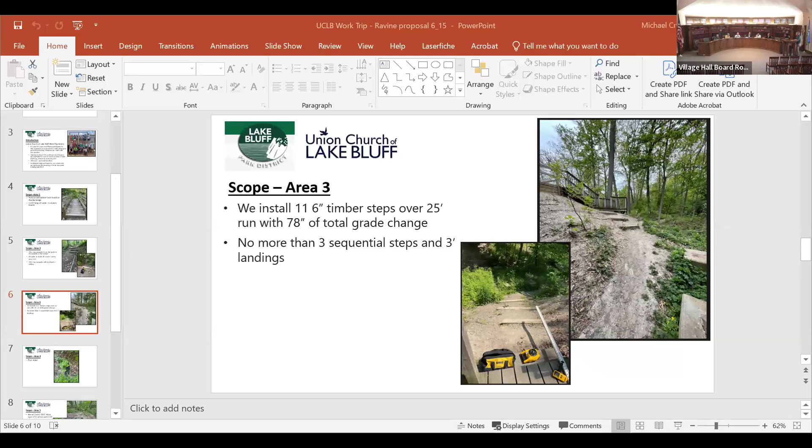John, you wanna give a little speech? Oh yeah, I'll put the PowerPoint on the screen here. I think you're on slide 6. Yeah, let me just start the slideshow from the beginning. Thank you. And there we go.

On behalf of the Union Church of Lake Bluff, we are happy to be here. I'm John Hirsch, representing them. We typically have done a work trip in the past to either Kentucky or Missouri. This year, our pastors are retiring, and they typically had led the work trip to all of these places. We've gone for about the last 25, 30 years, going out of state.

With their retirement, we didn't really have the bandwidth to organize a work trip. A number of people in the church said, well, what if we could do a project locally? What if we could contribute to the community that we live in and do something? So in the past, we've built — you can move to the next slide if you'd like.

And then to the next as well. So it's typically been a work trip to poor communities in Kentucky and Missouri, where we have built handicap accessible ramps and decks and those type of things for people in extreme need. And it's a great trip for our kids, a great bonding experience for them.

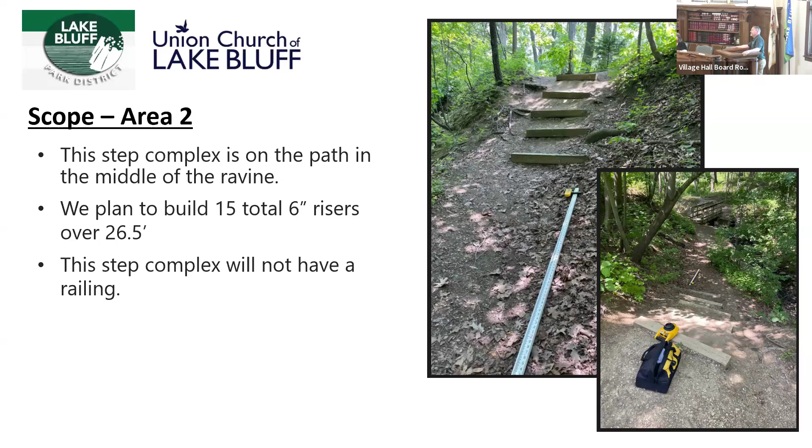We can go to scope number 3. This is literally right off the step complex that was just built, kind of underneath the bridge that was just replaced. You can see there's 3 steps at the top and then a really steep decline straight down towards underneath the bridge. Here we're planning to install steps again, to deal with the grade without needing a handrail based on the village code.

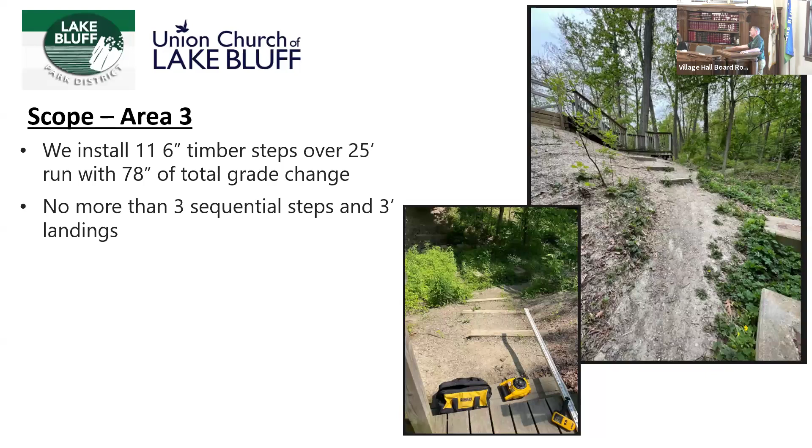And we can keep going.

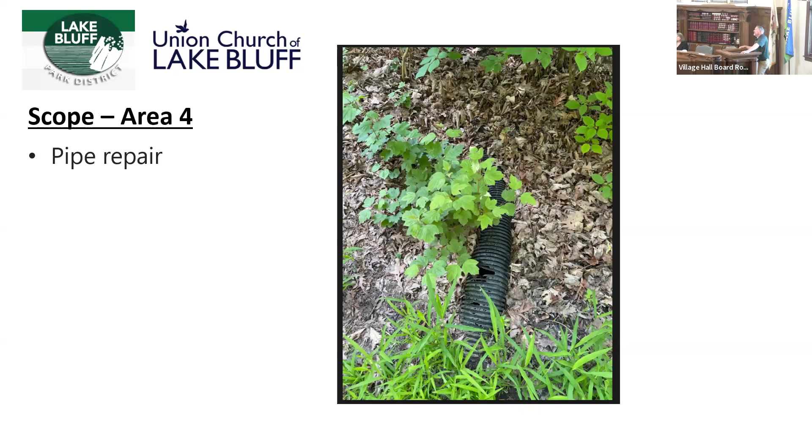And we can go to the next slide.

So very stable, and then we'd use grade 9 gravel to create the landings inside the timbers.

We're almost ready, honey. That's my wife, by the way. Congratulations.

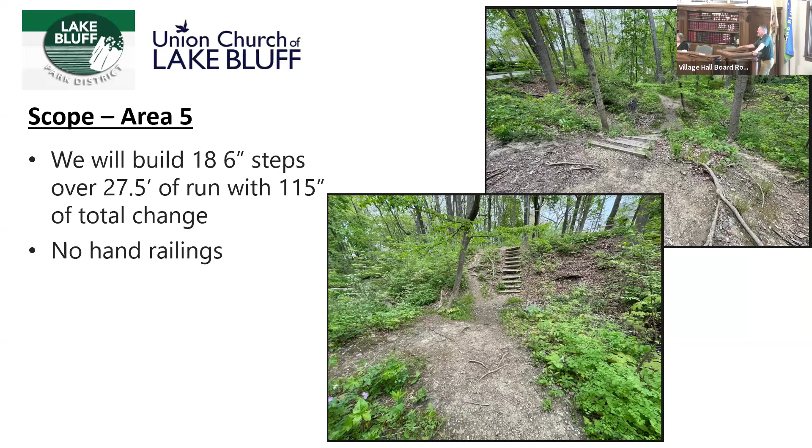All the participants are self-insured. We designed it to meet code so that nothing we build raises concerns. There was a concern with the park district that if we built something, their insurance company wanted to make sure it was built to code and professionally—not like an Eagle Scout project where someone could injure themselves and the park district could be liable. They were comfortable as long as we submit it to the village for permit, and the village approves and inspects it, so they were fine moving ahead with the project.

We can go to the next slide.

So timing, funding, approval - the project will be done if you approve it and we get our permit, which we're in the process of submitting and Mike is aware of that. So the project would be done this Saturday and Sunday.

That's the idea - we knew that a lot of the kids who have participated in the work trip in the past are going to be in town this weekend. So we're going to have pretty good participation. I think we have about 15 kids lined up and probably 6 or 7 adults. So I think we can accomplish what we're trying to set out to do.

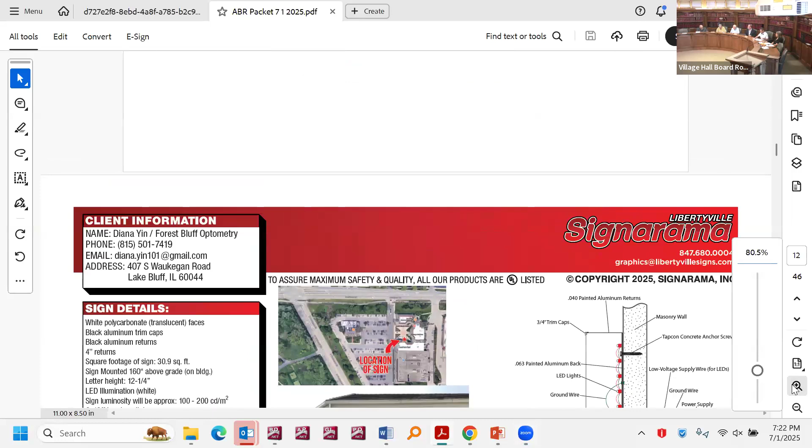Okay, we're gonna move to item 4, which is consideration of a sign permit for Forest Bluff Optometry at 407 South Waukegan Road, which is basically in Carriageway.

Good evening, can you guys hear me? Yep, we can. My name is Aaron Hurring, I'm representing the client here. I'm the owner of Signarama Libertyville, who will be doing the installation.

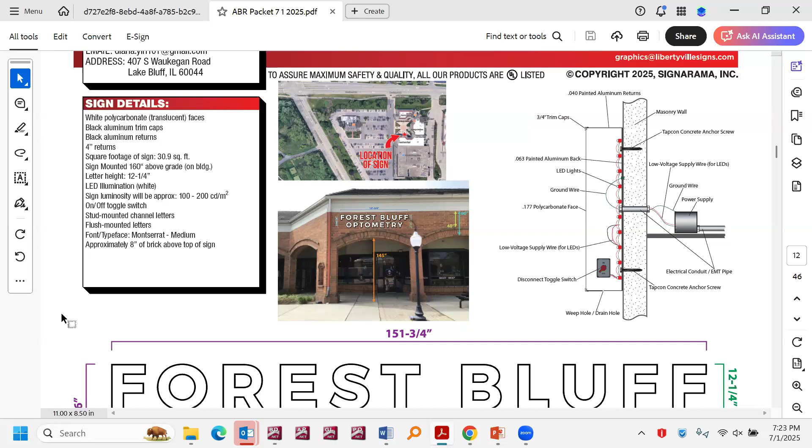These are fairly standard front lit or illuminated channel letters. White faces, black returns, no raceway. They're going to be flush mount directly against the wall, and obviously all electrical will be hidden behind the wall. Don't know what else you guys need to see or know, but it's a pretty standard set of channel letters going up on the brick face there.

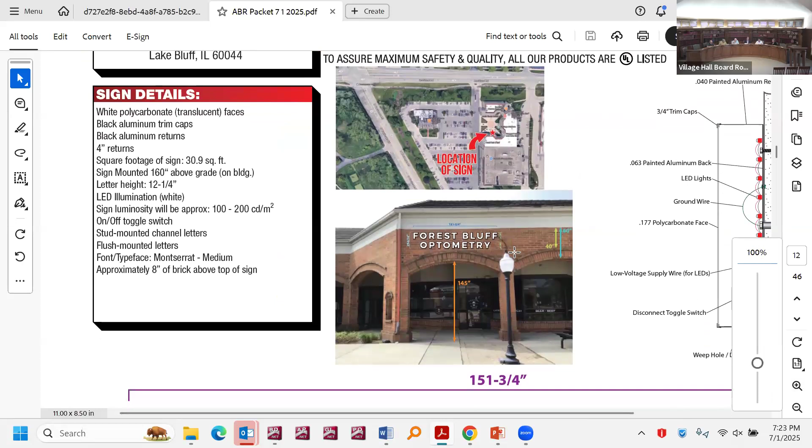Art, you have any questions? No. Okay, good. Neil?

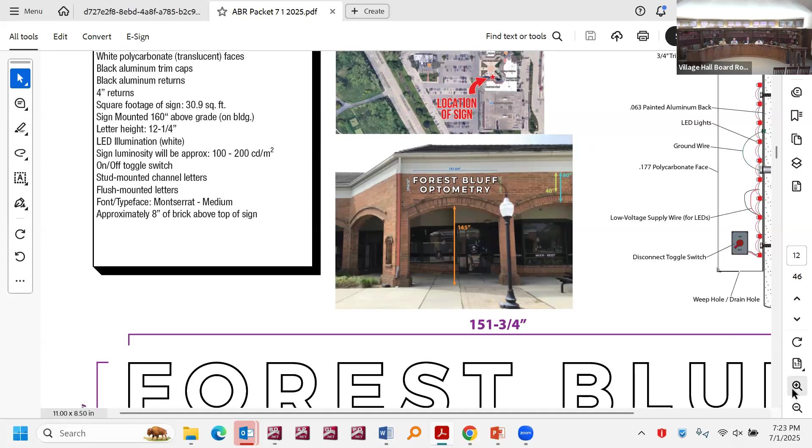Yeah, I'm not sure I understand exactly where it's going to be located as far as the height is concerned, from the top of the curved arch to the bottom of the fascia. We've had installations that went right up to the top and they looked awful. I assume that what's intended is that the sign be centered between the top of the arch and the bottom of the fascia, but I just wanted to ask you if that's the case.

That is definitely the case. It's matching the signage throughout the whole complex there that has the same size and the same typeface. I don't know if I can speak to every typeface that's out there, but it is a fairly common type of sign. I looked at them and they all look the same.

The other thing is there's a disconnect toggle switch. Is it within one of the cabinets or is it mounted on the outside? It'll actually be behind the wall inside, there's a point of entry up in the ceiling there behind that wall, it'll be tucked in there. Okay, because the drawing shows it mounted on the outside. Yeah, it's a fairly standard drawing that we just pull, but it'll actually be inside the wall in this case.

That's all I had, otherwise I'm comfortable with it. Matt? I have nothing, looks good. Sue? Yep, same.

Who wants to make a motion? I move to approve as submitted. Second? Roll call: Member Cottrell, Aye. Member Dolman, Aye. Member Gerber, Aye. Member Works, Aye. And Chair Hunter, Aye. Okay, it's approved.

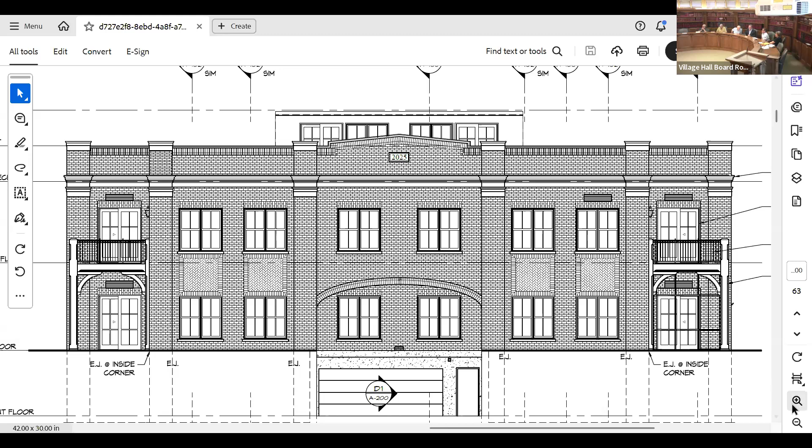Do we like it that it's shorter than the width of the header course, or should it match it? I don't know if either one is right, can you zoom in on that a little bit, Mike? Does that soldier course look right over the windows? It looks very last minute, because it kind of is, I think. I think Matt's right.

If it could need the width of the soldier course, then it could be a little bit narrower. Well, even if they're not any narrower, they just look like a little hat.

I hate when reality hits a building. Well, that sounds like good feedback: make the width of the soldier course and paint it to match the brick color, with a custom factory finish color, if you can. Would we like it better?

I'm just wondering what's the worst condition. Should it sit on the soldier course? Should it be centered and above? It's almost like if you were designing it and knew they had to be there, you could make it so all the windows incorporated it somehow. You put it below and put the soldier course above, but have the others be different.

I'm sure at some point everybody's gonna forget about it, but it's like anything in design, we're hyper focusing, but might as well make it as good. I would just say if it's not just sitting on top of the bricks, but then you have a weird brick thing, that's not good either. That makes no sense. Stand it out to match. I think we just do that, match the soldier course. Okay, let's do that.

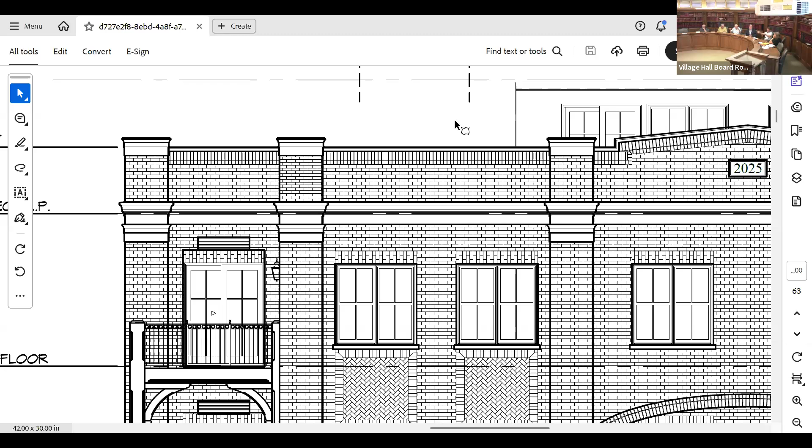Okay, well thanks for that feedback. The last thing I wanted to mention is the 570 Evanston project. Tom Dobbins is planning to come back here in August for another workshop discussion with preliminary plans, then he's planning to be at the PCZBA for their review mid-August, and then possibly back here with his final plans.

So it's us, PCZBA, then us again, when he comes down. Because it's just a workshop, sort of an extra step he added. He wanted to get back to us with the workshop stuff, because the code says for him to come here for final approval after PCZBA. Oh, that's nice, I felt a little bad about that.